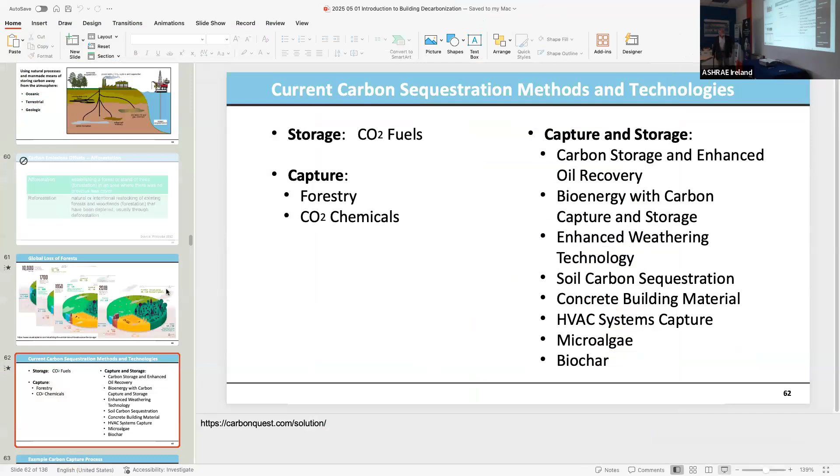Well, thank you very much for the invitation. It's always good to be in Dublin. I was here about 18 months ago - one of the groups I'm involved with, IBPSA, Building Performance Simulation, had our board meeting here, partly because most of our membership is here in Europe.

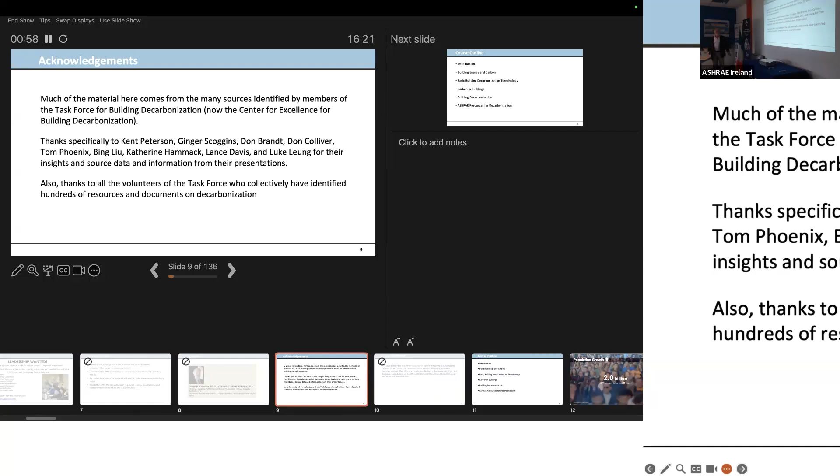So what you're getting is kind of a shortened version of a 2.5-hour talk I give for the ASHRAE Learning Institute, so this is a truncated version, but the core content is still here. Much of the material came from other places, other people - multiple past presidents, Kent Peterson, Ginger Scoggins, Don Colliver, Tom Phoenix, all past presidents of ASHRAE - and others who were together with me on the task force for building decarbonization, and that's how I was able to at least start the outline of what's here.

So we're going to talk a little bit about building energy and carbon, terminology, carbon in buildings, building decarbonization, and what ASHRAE is doing for decarbonization. I will cover some of it very briefly, and I'll be sharing the presentation so the chapter can post it, because there are about 10 pages of web links at the end for various resources to make it easier. We won't go through all of that.

Excuse me. So we are seeing, in late 2022, the global population changed to 8 billion people on the planet. We're expected to add another 2 billion in the next 30 years or so, so that's a big move forward. That means we have to deal with a 26% increase in people, housing them, having places for them to work, and that means we're going to have to create more space. Estimated by 2060, we're going to need 230 billion square meters of space, which is constructing New York City every month.

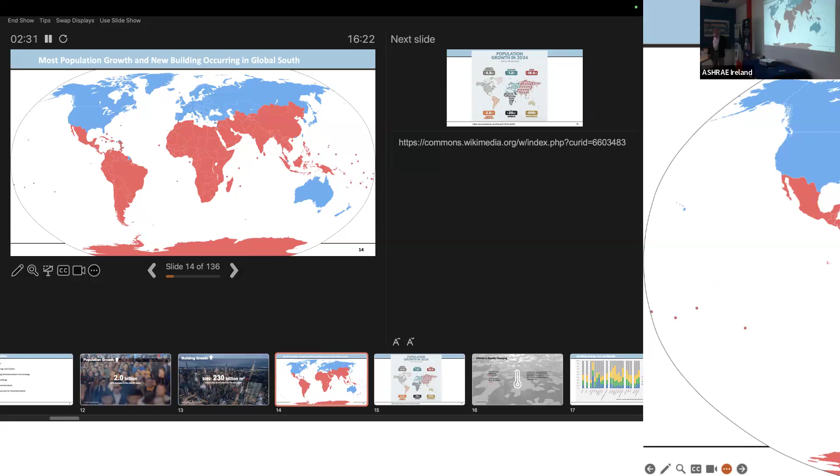Now, it's not going to happen in the term the UN uses, the global north, the blue part here - it's all in the global south. You see this population growth: North America grew a little bit, only like 1% or so. Europe is actually down a bit last year. Asia is still growing. Africa, of course, is the highest growth area, and that's where a lot of the largest growth is. China is shrinking a bit at this point, but India is continuing to expand. Indonesia, Nigeria, and a few other African countries are going to be larger than any other countries out there in terms of population.

Under the Paris Agreement, countries committed to trying to reach 2 degrees C, but it was changed to 1.5 as far as the 2018 IPCC recommendation. But that's already a challenge. I'm not going to talk about climate change here, but last year was already at 1.54 degree change globally. So we're already exceeding that, and we were supposed to not reach this until 2100.

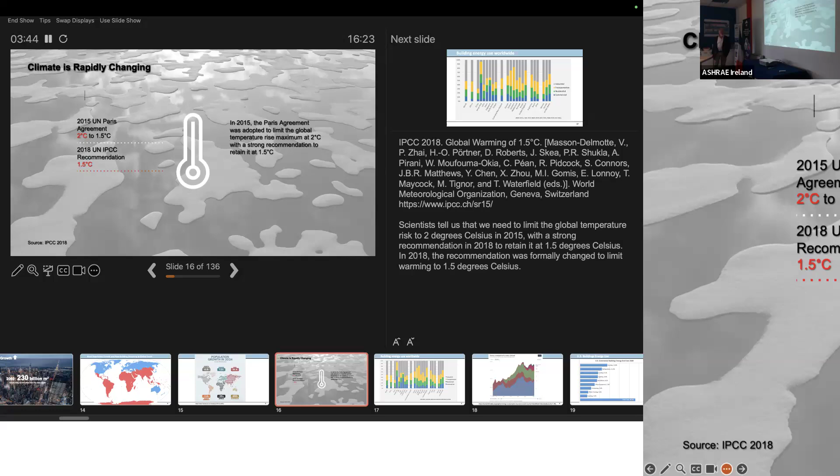The other thing I'd like to talk about is our energy, because energy and carbon are somewhat interchangeable, particularly for buildings. Globally, buildings are responsible for about 30% of energy and 37% of carbon. A lot of that's driven by electricity and other use.

The range is there, the third and fourth bars, China and Hong Kong, where China is only about 20% for buildings. But when I started putting these together 20 some years ago, that was only 10%. So they've doubled the amount of floor space, or at least the energy consumption in buildings. Hong Kong, on the other side, is 65% buildings and only a little bit for industry. So industry energy use is driving their economy in China, and they have a lot of coal use as well. You see Europe generally is just a bit under 40% for buildings, and it varies by country.

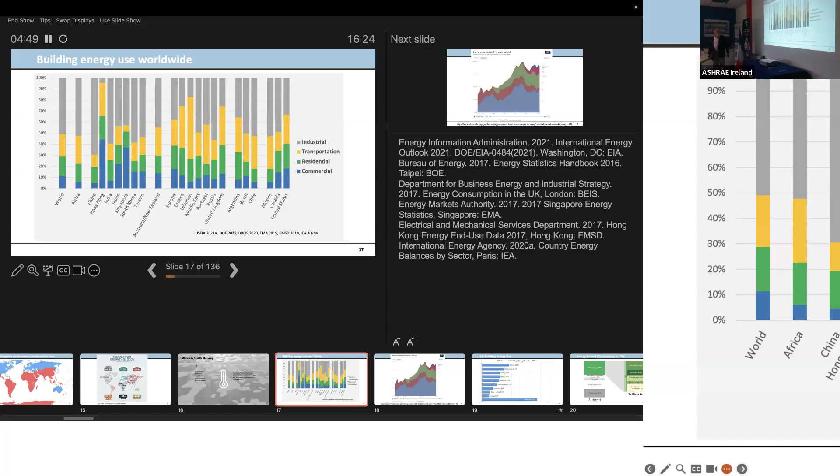In the US, about 40% for our buildings, half residential, half commercial. I only show this to make the point that our buildings are quite different than they were 20 years ago in terms of what we were doing. Yes, we have traditional heating, water heating, cooling, appliances and cooking. Computers are showing up in US buildings as a percentage, but then there's this whole category of other uses. What that means is devices like this that draw a little bit of power are now accounting for a full quarter of energy use in the US.

I have 25-year-old twins, and our son is living with us again after university. I wonder why my Wi-Fi is slow. I go on the router and there's 17 devices connected, and probably 16 of them are his. He's got everything on it. So that's what's driving that today.

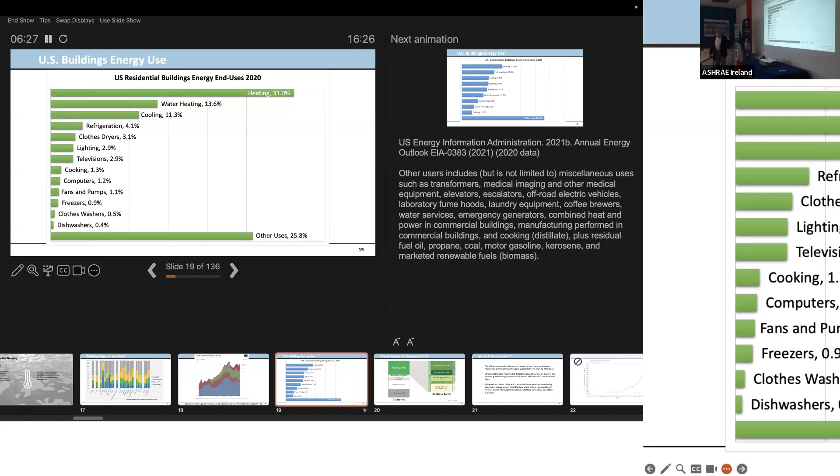So we need to keep in mind that it's not just the traditional things we worry about, building fabric and the systems. It's got to be everything within the building as well.

As far as commercial buildings, this is across everything, but if it were a supermarket or grocery store, refrigeration would be 50% of energy use, with cooling and lighting kind of secondary. For an office building, yes, heating, cooling, lighting, ventilation.

But the interesting thing to me across the sector is that office equipment and computing is now 13%. A lot of that's driven by growth in data centers and other computing uses there. Again, there's another large 'other use' percentage that does include elevators and other lifts and such.

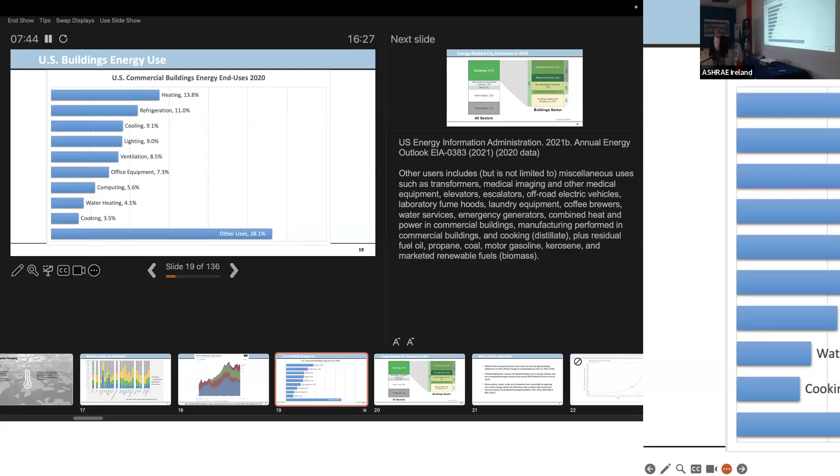The computing, I think, is going to continue rising for a while. There's such demand for AI computing that we're seeing data centers, particularly where I live in Washington, D.C., Northern Virginia is kind of an epicenter of that because 70% of the world's internet traffic goes through there. Which is surprising, but when all the fiber optic cables were being put in place in the 90s, that was already a big hub for that. So that's kind of not surprising. We are seeing that drive for growth.

If we look at carbon emissions, buildings are responsible for about 37%. And if you break that out, 10% of that 37 is for new construction. That's the embodied energy and the energy to construct, with residential taking about half of the remainder and non-residential a little less.

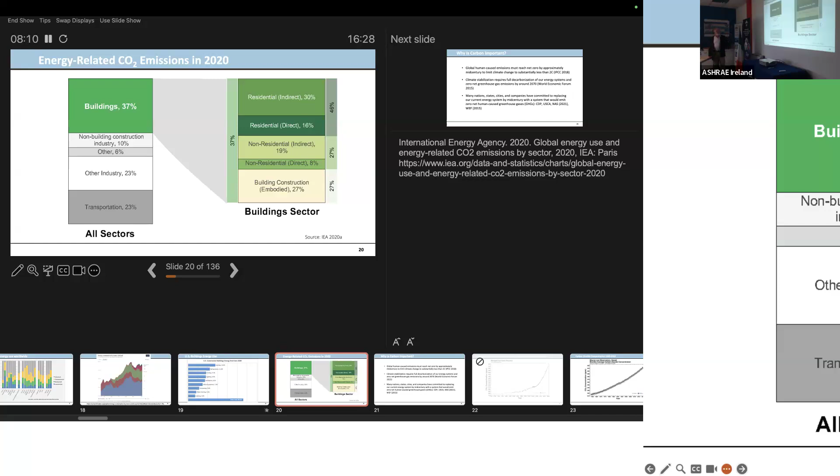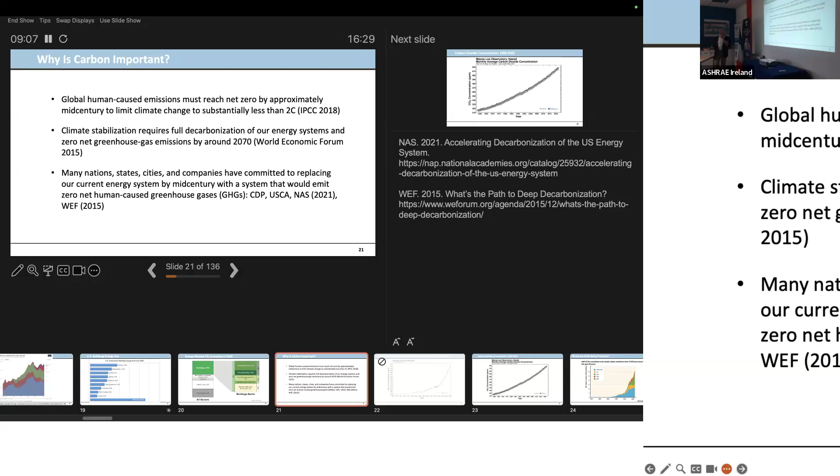If we're going to actually decarbonize and work to affect climate repair, we're going to have to limit climate change to less than 2 degrees, which is increasingly difficult given where we are today. That means decarbonization of our energy systems by 2070, and in some cases it needs to be earlier. A lot of nation states, companies and cities are really taking the lead here today in replacing current systems. There are a number of places saying they're going to be net zero by 2030, and they're looking to transform their energy supply. A combination of getting away from fossil fuels and moving toward renewable electricity is really key.

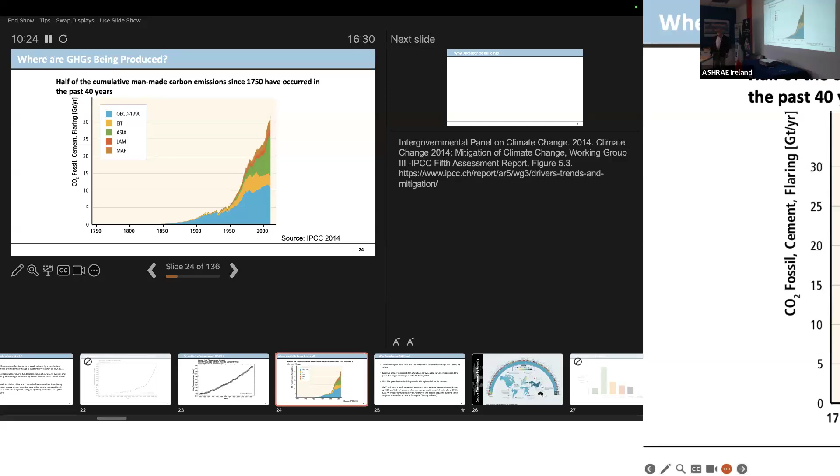Half of the carbon we've put in the atmosphere has been there in the last 40 years. Initially it was OECD countries, primarily Europe and the US, back early in the century, and they're still contributing almost 40% of that. But energy is in transition—Asia, Latin America, Asia particularly—China's growth in energy has been just phenomenal the last several decades.

So why does this matter? Climate change is probably going to affect every one of us. It's going to be the biggest challenge we as a society have faced in trying to address. It affects everybody in different ways, but it's something we're going to have to deal with if we're going to be able to survive. There are places that are going to be too hot to live if trends continue.

Buildings are already responsible for over a third of the carbon contribution, and the building stock is supposed to double by 2060, so that's going to be even more exacerbated. If we're not careful and don't design our buildings to be energy efficient to begin with, they can lock in those energy losses and high emissions for decades. Even with changing out mechanical equipment and efficiency over time, it's still the inefficiency inherent in the building that will remain.

The UN Environment Program says we've got to cut emissions by about 50%, that's about 6% per year by 2030. When they wrote this a couple years ago, that 6% per year drop was about equal to what happened during the COVID pandemic when everybody stayed home. Well, we're already not getting any savings—we've already come back and passed that globally today.

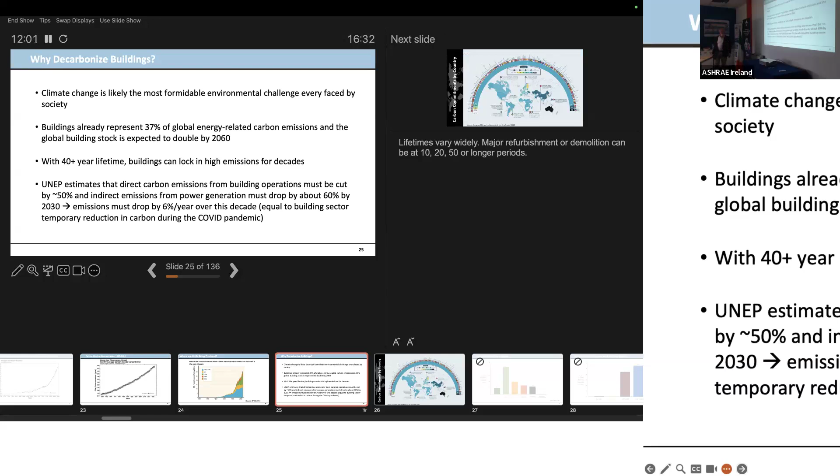This is a commitment for meeting the Paris Agreement, the 1.5 degree decarbonizing target, and there are a few countries that have achieved it or are about to—Uruguay by 2030, Finland by 2035, and a few smaller countries that had huge hydro resources to begin with. But the bulk of them, the blue bar, is 2050, and that's what most people are saying they're going to be able to achieve. Of course, the U.S. has withdrawn or will withdraw from the agreement, backpedaling on just about everything.

But I think the world is already moving forward, and one of the things, my personal opinion, the current administration doesn't understand, is that they think coal was punished for being coal and being dirty. The reality is that natural gas was cheaper, and renewables are now cheaper than anything as a new source for electricity—and that's been true for a while. I lived in California in the 90s, and at that point the cheapest source for the electric utility for new power were wind turbines. That was already true 30 years ago. So it's not that coal is dirty so much as it was a cost reasoning for that.

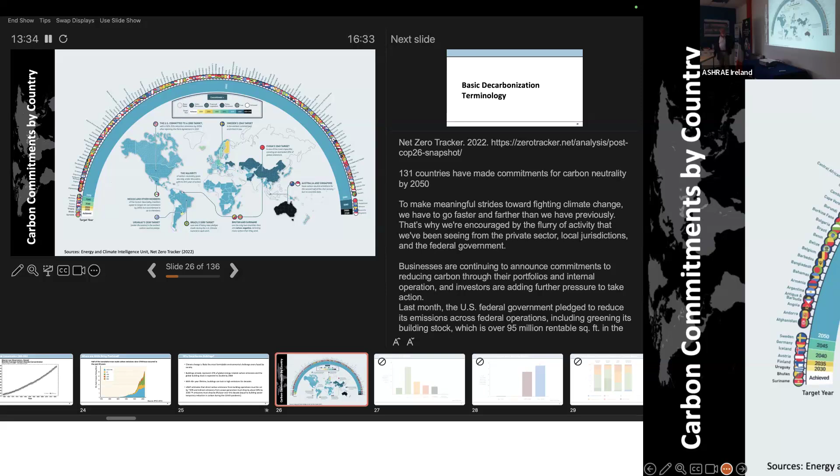I think we're going to see it continue in the US despite the lack of interest from the administration. So I'm just going to flash through this to give you an idea of the terms we're going to talk about.

Carbon dioxide, global warming potential, greenhouse gases—these are all definitions from the IPCC. Carbon dioxide equivalent emissions, or CO2e, that's really the key term here. It's basically taking the global warming potential of each of the constituent gases we're emitting, multiplying that by the mass that's there, and looking at that over a 100-year horizon. So if I'm talking about carbon, I'm mostly talking about the carbon equivalent for everything here.

Operational carbon is the emissions from operating something, the building or the industry plant. Embodied carbon is the carbon associated with creating the products, materials, and construction itself that make up our buildings. Direct means fossil fuel combustion on site. Indirect is from the power plant, which may use fossil fuel.

The prior administration pushed to electrify everything. Electrification is really important, and heat pumps were being pushed in a big way. I know in Europe they were too, Germany was going crazy with heat pumps, and I think that will continue.

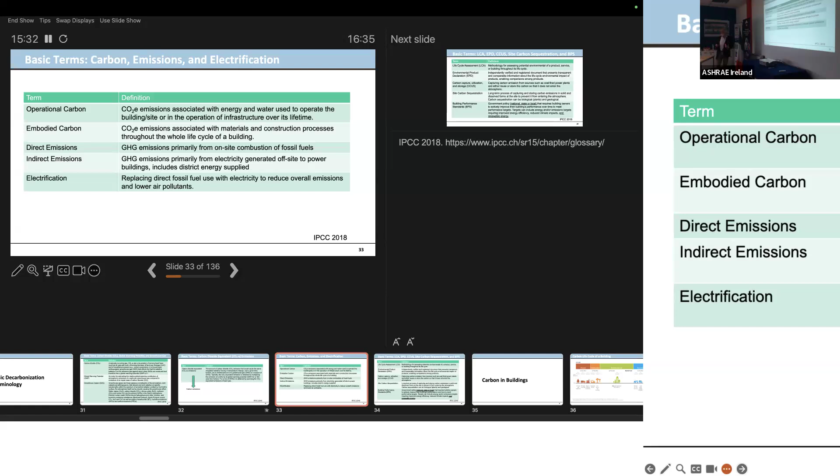The problem is that if we electrified everything in the US, the grid would fail. We need twice as much power as we have now. So one of the things that has to be done with electrification is efficiency, and if we don't do that, we're going to be paying for a lot of new power plants.

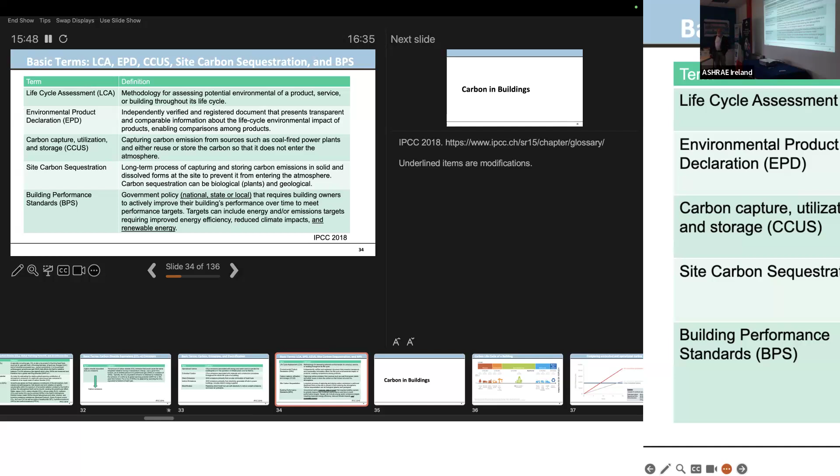Other things we'll talk about: life cycle assessment, environmental product declaration, carbon capture, site carbon sequestration like trees, building performance standards, and other things happening that are pushing in different ways.

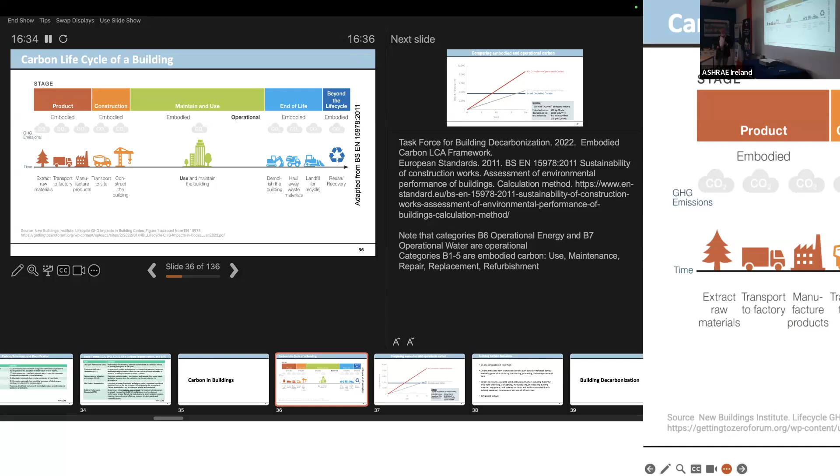So it looks like a lot of embodied carbon is dominating. For most of our buildings, operational carbon still outweighs embodied carbon. As buildings become more and more efficient toward net zero, then we'll get there.

Here's kind of a typical example: a building with a 20-year life has embodied carbon of 400 kilograms per square meter over that life, or a very efficient building only 20. The initial embodied carbon is estimated at, I don't have the exact number up there, but say around 4,000. What it shows is that as buildings become much more efficient, embodied carbon is going to take over. I think this gives us some time to work on that.

Two of our building materials, infrastructure in general, that are very energy and carbon intensive are steel and concrete, and there are already moves afoot to address that. I know car manufacturers, I can't remember which German one it was, are already talking about blue steel or green steel, producing steel to make the car with renewable energy so they're not contributing to emissions. We have some time to try to address that initial embodied carbon, because once you use it, it's already there, there's no reason to try to replace it, the new should be better.

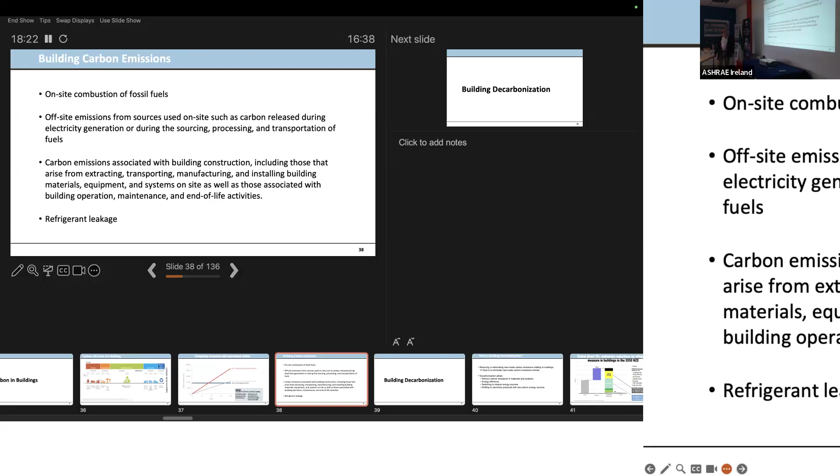So there's on-site combustion of fuels, off-site emissions from electricity production, and the emissions related to it. Another big one we may not think about is refrigerant leakage. Buildings are actually pretty good about not leaking, but our transport, the lorries and everything driving around out there, leak quite a bit. I'll talk about that a little later.

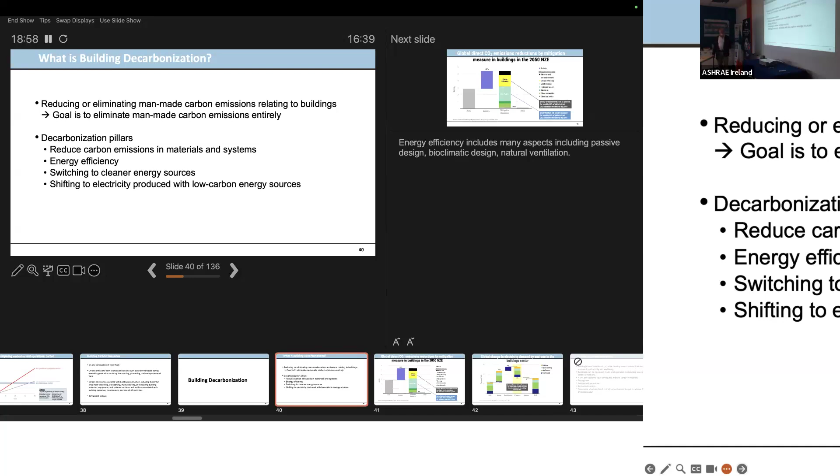So what does that mean? It means if we're decarbonizing the building, we've got to reduce man-made carbon emissions entirely, that's the ultimate goal. It means moving away from fossil fuels, improving energy efficiency, and switching to cleaner sources and low carbon electricity where possible. The grid will continue to get better, they have been for many years.

This is from the International Energy Agency, their kind of roadmap for how we could get to zero in buildings. Starting in 2020, by 2050 we've doubled the amount of floor area. The mitigation through energy efficiency, electrification, and some other behavioral elements means we can reduce emissions by 98%, close to zero. So that is a possibility.

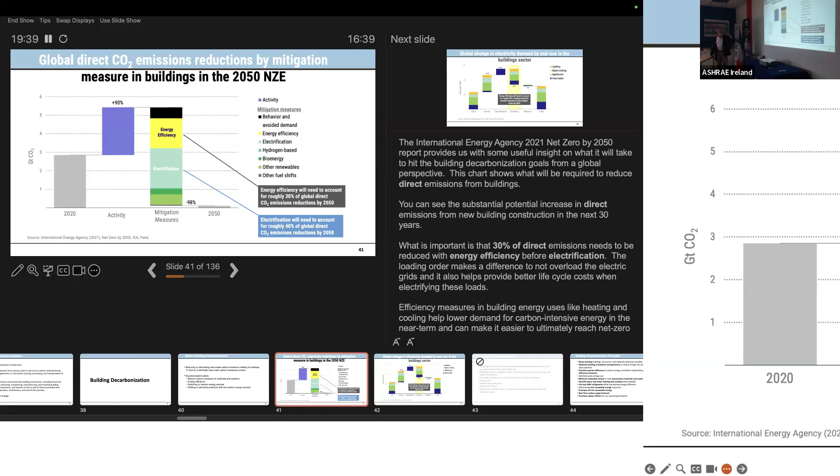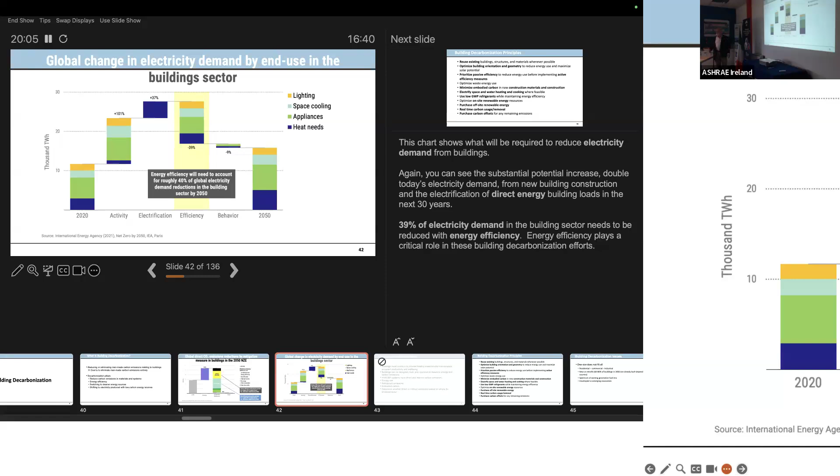A combination of efficiency and electrification are really key for that. If you look at it more closely, what's causing additional activity is increasing lighting, cooling, and appliances, and electrification is going to raise the amount of energy needed a bit more just because of inefficiencies of the grid. So efficiency has to account for about 40% of that, we can't just say electrify everything, that doesn't solve the issue.

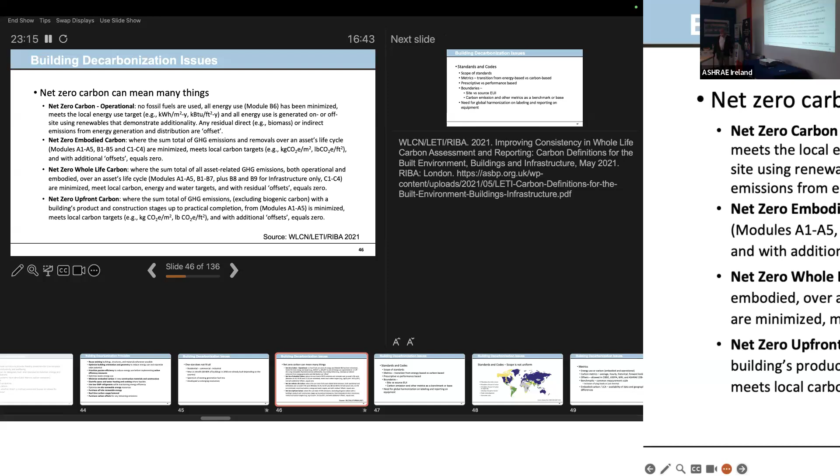And net zero upfront is minimizing all of that, but then working to do additional offsets to make sure the building starts at zero to begin. A little different from that whole life approach, but there.

The other thing is we have a number of standards, both energy and some carbon standards now in place, but many of them don't cover everything. The metrics—ASHRAE Standard 90.1 for many years was kind of the de facto energy standard, but it's now transitioning from an energy basis to a carbon-based standard, and that's what it's going to take to help us start thinking about the end result, not just how the energy is done.

Many standards globally are more prescriptive instead of performance-based. Performance gives you a lot more flexibility. And then it goes to where are you measuring—what's the boundary for that? Is it just the building site, or all the way back to the power plants? Also then, is it carbon emissions, or other metrics? What are we starting with?

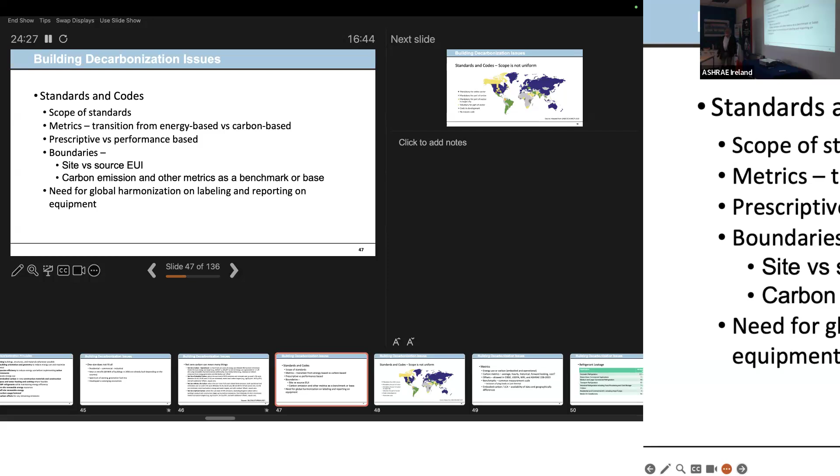We also, particularly in the building services area, need better labeling and reporting on carbon emissions. We don't have good ones today. There's some hope for that, I think.

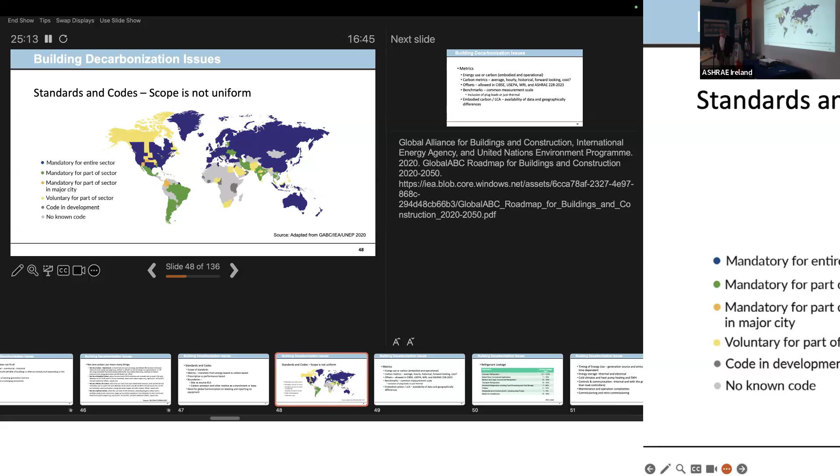This is from a UNEP report showing the purple areas have some sort of standards. You see, even in the US, we don't have statewide standards in many of those states in the middle. Now, large cities in there probably do, but for most of the state, there's just nothing requiring any energy efficiency. You see some hope in South America, Europe, and Asia—at least North Asia is pretty good. India has one, not terribly well enforced at this point, but you see kind of that blank slate for Africa, and that's where a lot of the construction's coming.

The other thing, metrics: what are we specifically talking about? I can talk about carbon dioxide equivalent, but where are we measuring it? Is it energy or carbon, embodied or operational? And then which of the carbon metrics do you want to use—average, hourly, historical, forward-looking, cost-based—different organizations are using all of them. Some people talk about a 20-year horizon, some people talk about 100, and that makes a big difference. I believe the ASHRAE board has said to use 20-year now.

I may be wrong on that. Offsets—CIBSE, US EPA used to, World Resource Institute, and ASHRAE's new Standard 228 all allow offsets against that operational carbon. Do we have a common measurement? ASHRAE 90.1 is pretty much regulating everything except the interiors. Kitchens are included, ventilation, lots of different sources there, but is it everything, including all the plug loads that I showed you, which can be a large part of both?

And then embodied carbon and doing life cycle analysis, do we have the data? Europe's got decent data sets for LCA, but the US is kind of spotty. And then in other places, there's just no data available for looking at what the carbon impact of various products and systems are.

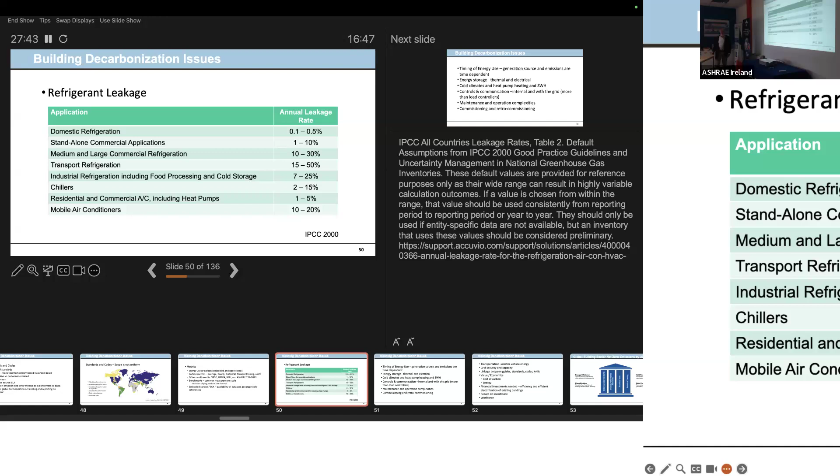Our chillers and AC, not bad. Chillers about 15%, heat pumps down in the 5% range. So not contributing too much, but there's still more we could do because they are particularly high global warming potential.

Other things: timing, depending on when you use electricity or any fuel, what is the generation source and the emissions? When do they occur? Would it be better if you used energy at different times? Energy storage, could we offset some of that by storing energy, both thermal and/or electrical, which we're beginning to see more of.

At the utility scale, I've seen several 5 megawatt systems that have gone up in Australia, and they're using them not only as backup but as real-time peaking to try to reduce the cost of peak electricity because they can store the renewables at night.

Keep talking about heat pumps. Heat pumps don't work so well once you get below about -8, -9. They work okay, but then you're getting down to electric resistance, and so your COP is 1. But there's a lot of work going on right now, so I expect we're going to see some sea changes in cold climate heat pumps.

We don't know what's going on with the grid, we don't have a lot of good information. ASHRAE has written a guide about integrating with the grid and how to go about getting that information, but it's got to be more than just load controllers.

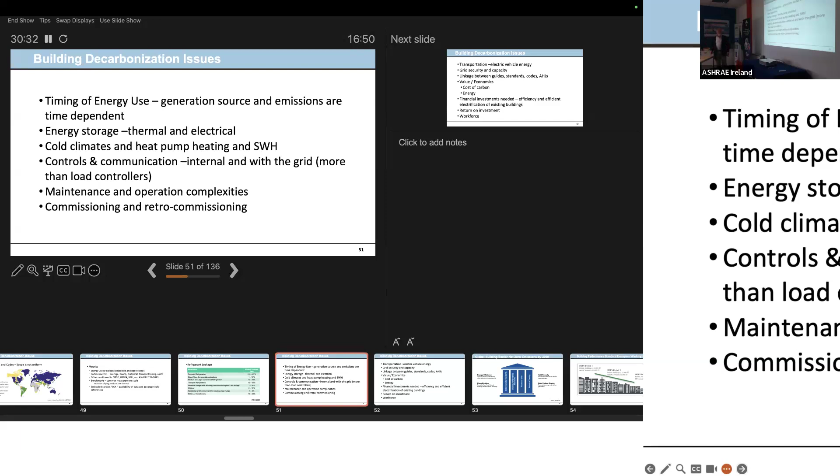Transportation, we're dealing with EVs, energy on site. I see EV chargers around this office park. How is that contributing to energy use? Grid security, and security is kind of a real issue. A lot of what we're talking about today, it matters who has access to information and when they should have access.

Are the guides, standards, and codes actually having an impact for the local people? Are there ways to teach people how to go about doing a better building in a guide? A standard limits what you do, and the code is the legal limit. But is that all cooperating?

Value and economics, what is the cost of carbon? What's the cost of energy? And how is that working together? Are we seeing the benefit of reducing our carbon in particular buildings?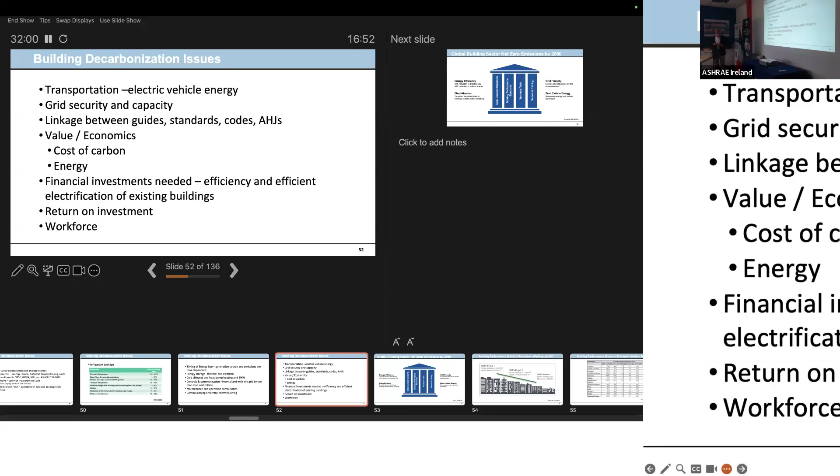I see estimates of financial investments on the order of $3 to $4 trillion a year that need to be invested to make our buildings better, just for that. That's a large amount of money we have to put forward. And is there any return for that? Do we have the people that can do it today? It's a workforce issue. Are we training people the right way to be able to manage these more complex buildings, but also to build them as well?

This is another one from the International Energy Agency. Efficiency, electrification, grid friendly, and zero carbon energy are all key themes they have. But we need standards driving toward net zero, building performance standards. I'll talk a little more about that - the technical tools for design and retrofit professionals to do that, and the training to bring up a new generation able to handle this.

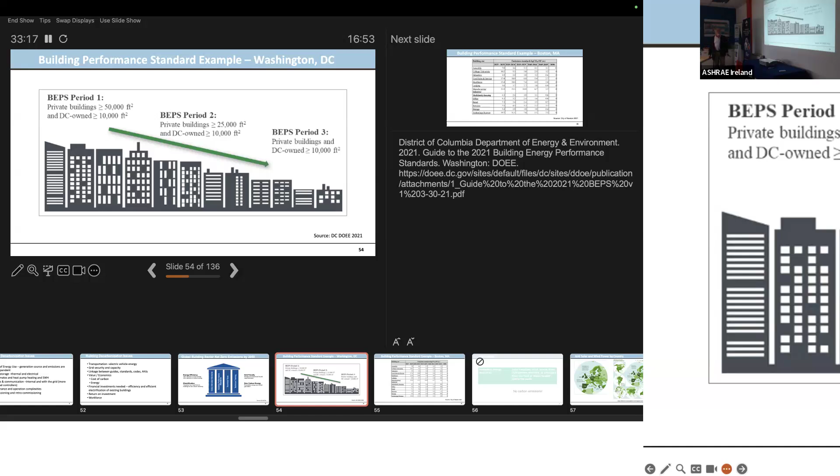This is an example of a building performance standard - this is Washington, D.C. They've decided that beginning next year, buildings have to disclose their energy use, and they have to be on a track to reduce it to zero - either net zero, buying offsets, or other ways. This is showing, starting with buildings over 5,000 square meters and DC-owned buildings of 1,000, then increasing to 2,500, and then on to everything over 1,000 square meters. So that's a big step forward.

And this is an example - this is Boston, and they've actually set kilograms of CO2 equivalent per floor area for each year by all the building types. So they're already beginning to look at that, and you see that by 2050, everything goes to zero. I don't know how it's going in Boston.

New York City has the same thing, and the targets are beginning to hit by the end of this year. There's supposed to be a 10% reduction in energy use or carbon use in every building in New York City, which will be very interesting to watch. So the building performance standards are pushing that efficiency, that carbon reduction, from the top down.

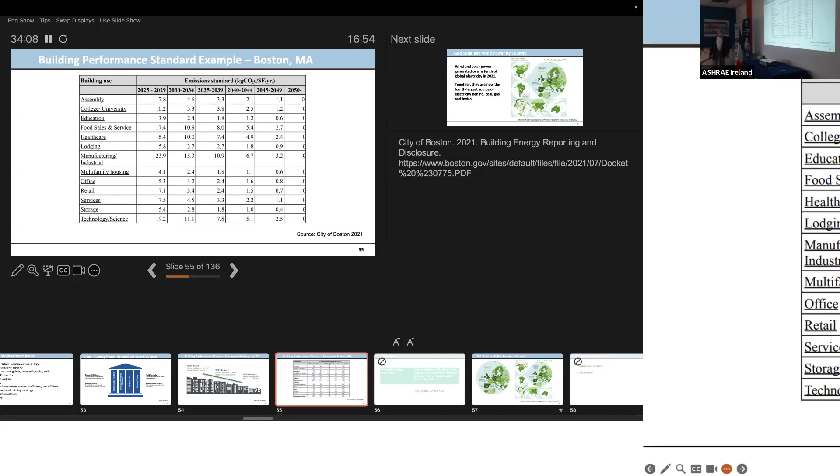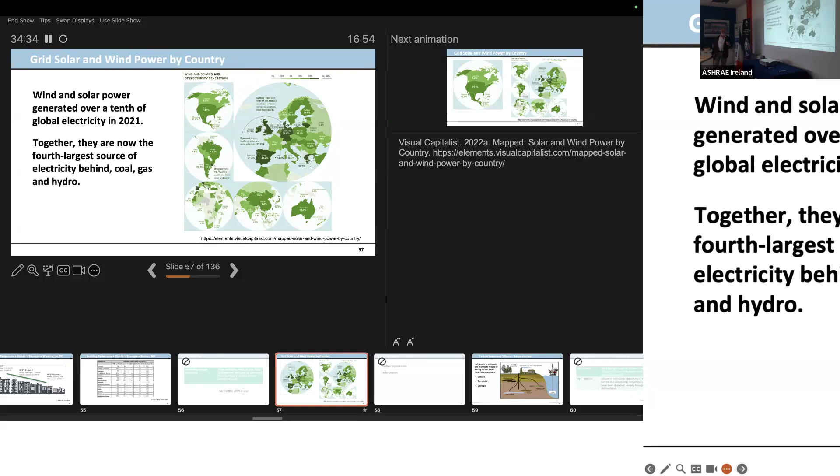Renewables play a big role both at the building level and at the grid level. A tenth of global electricity - I think it's up over 15% last year. I don't have a new update on this, but it's the fourth largest source behind coal, gas, and hydro, and I think that's changed - in some cases I've seen it surpass coal recently. But if we look at North America, the US was about 13%, and that's pushing 20% now.

Other places, not so much. Canada is a little lagging there, but they have a huge resource of hydropower in much of Canada. South America - Chile at 21%, really good. Uruguay is getting over 46% of its power, and there are some days it's totally renewable energy. Brazil looks like it's behind at 13%, but over 40% of their electricity is already hydro-based, and it's only the last 30 years that have really driven them to build other kinds of power plants.

Looking at Africa, not much - Mauritania and Morocco at 13-14%. Kenya doing well at 17%, but much of the rest of the continent is not doing anything. If you look at Nigeria, which is the largest economy in Africa, it's an oil economy, so they're not really that interested in renewables right now - they have cheap resources. Looking at Asia, China at 11%, aggressively building solar and wind where they can.

India is coming up. I was in India, I guess it was February, and driving along the road you would see these huge wind turbine blades just sitting there waiting to be transported at night, because they block every lane of the highway. So they're really pushing for that. Asia's got a bit of work to do.

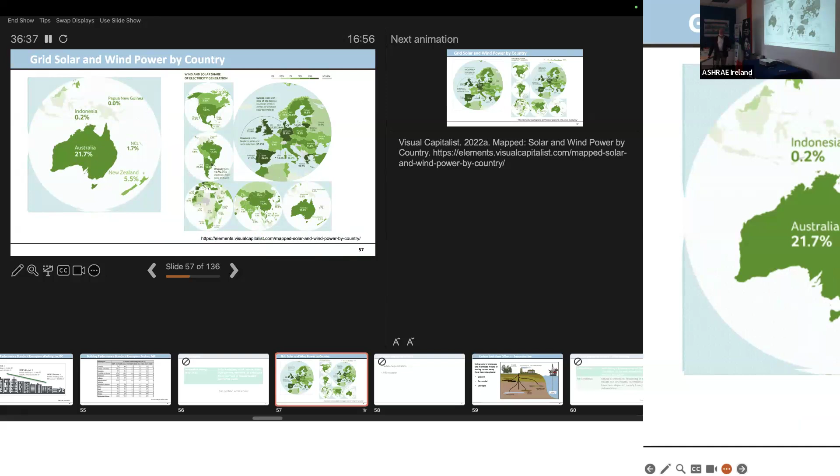Australia - and I didn't point it out, but in the chart that showed the 2050 goal, Australia said they weren't going to be able to meet that till 2100, and yet they're already at 21% renewables. The problem is they have a lot of coal and it's cheap, and they're shipping it to China primarily at this point. And of course, Europe is doing quite well, in the 30s, with Denmark up at 51%.

There are a lot of days when Denmark, in the spring and fall months, is totally renewable power for the grid. The UK just shut down their last coal plant last year, so it's increasing as well. Finland, I think, is going to be an early growth.

The renewables not so much, as they put a huge new nuclear plant online, and nuclear, except for the embodied part of the plant, the production part is pretty much zero carbon, so it is still something that can be used for that.

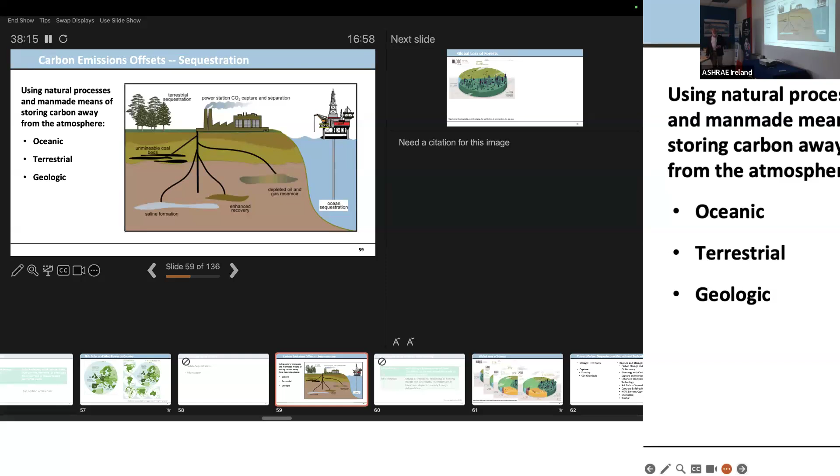Other things we can offset: we can put the carbon in the ground or in the sea. Trees, of course, are a great source of doing that. Power stations, we can capture and separate that. There's a lot of work going on to keep that clean. Pumping it into the ocean, and the ocean is the largest storage of carbon anyway. The problem is, as ocean temperatures rise, as they've been doing the last few years, that means they can store less carbon. Cold water stores carbon better. But we can also put it into unmineable coal beds, saline, or depleted oil and gas reserves as well, get it underground.

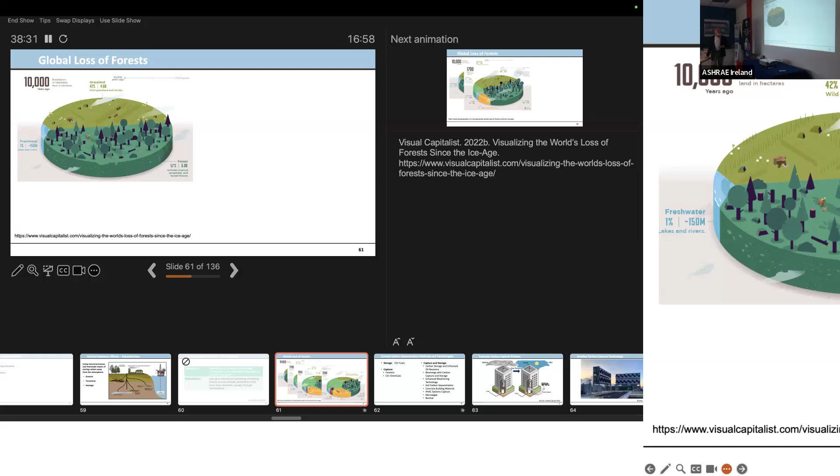A lot of the crops are to feed that livestock. Grasslands down to 12% globally. Forests cut down, we've now lost about 10% for that. Urban is still quite small. By 2018, urban is now 1%, but grazing is at the same level. Grasslands recovering a bit, and crops are still growing. We've got 15%. What that means is we're eating into the forest.

So if the forest is a resource for carbon sequestration, we need to use that. Unfortunately, we have places like the Amazon in Brazil where everything's being cut, somewhat illegally, clearing one of the best resources for sequestration globally.

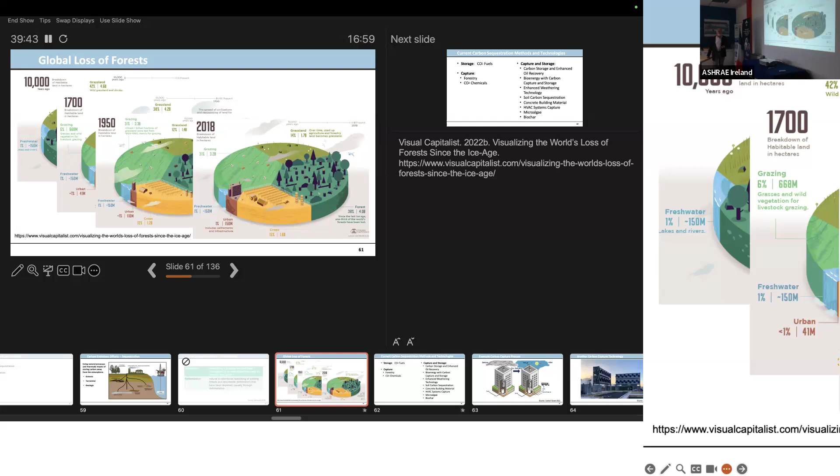Other things, we can store CO2 as a fuel. Forestry, we can use it in chemicals, often, and a long list of other things, but frankly those are the only two things we could do as a building. Working with concrete, reducing the carbon impact there, which is quite high, and also at the HVAC, the building services level, trying to capture it before it's released.

This is interesting, this company basically puts something to capture the carbon before it goes up the boiler flue, and stores it on site. Then once in a while a truck comes by and takes the carbon off before they use it, so we're not releasing it into the atmosphere. I don't know what the cost on this is, I can't expect that it's going to be cheap.

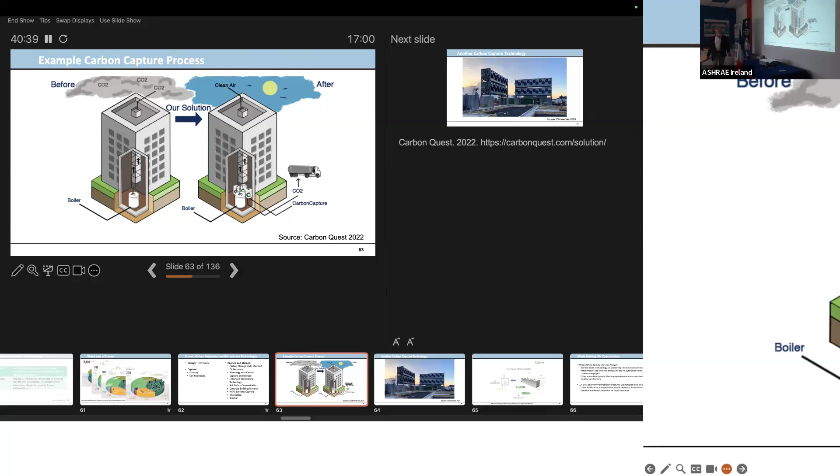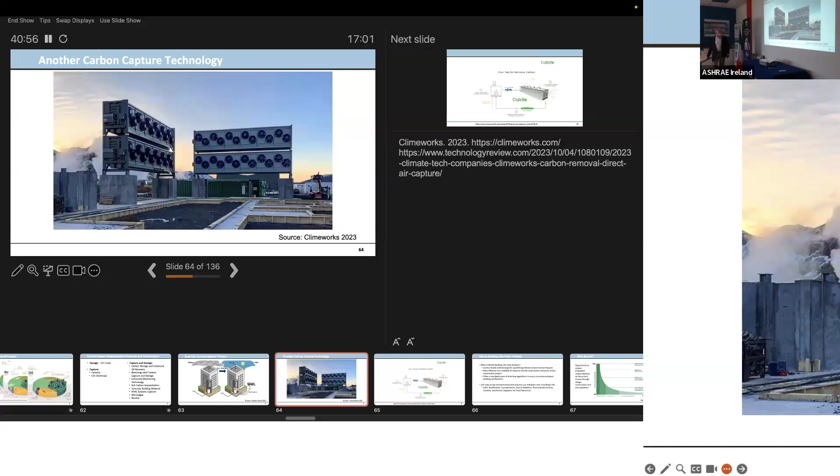Here's another one. These fans are literally sitting up in the air, and through internal processes they are capturing carbon and pumping it into tanks. I don't know how well this is working.

Another one, this was showing how it works: putting the CO2, it's absorbed into calcium carbonate, that then, with the carbon captured, decomposes, and then that's stored, and then that sends the calcium hydroxide back, so it's kind of a continuous cycle. That's one way of having it happen.

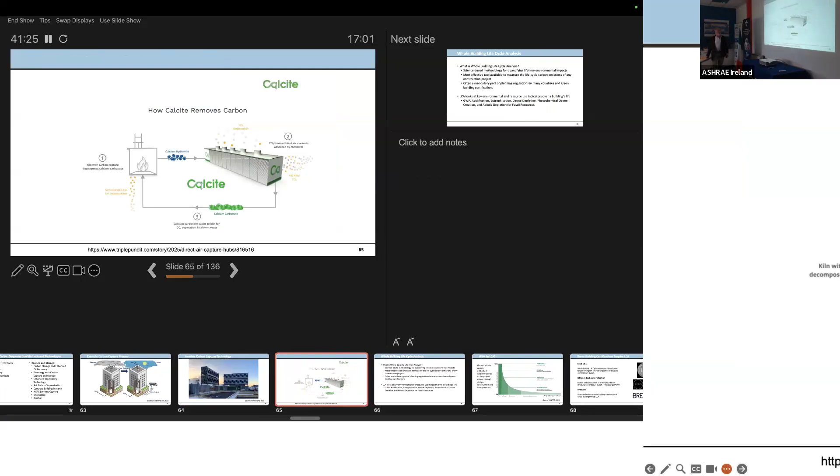Like with most things, the sooner you do an analysis, the better and more effective you're going to be. So in planning, early design, you can have very effective reduction in carbon. By the time you're in construction, you're probably too late to do much, so that's a kind of a challenge for us.

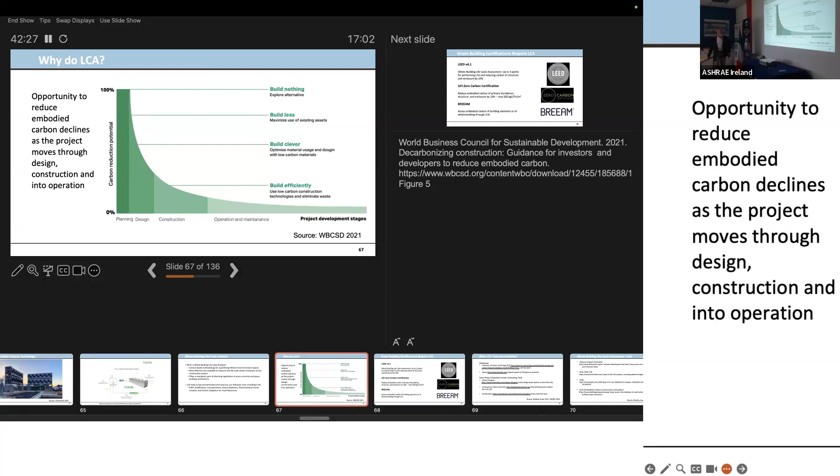There are places, LEED, I think LEED version 5 has now come out and they're saying about the same amount. The zero carbon certification from the International Living Future Institute has reducing embodied carbon of the foundation, structure, and enclosure as a theme - that's the steel and the concrete primarily, and glass - and they're saying reduced by 10%, not terribly a lot. BREEAM from the UK takes an independent view of assessing the embodied carbon, a separate consultant does that.

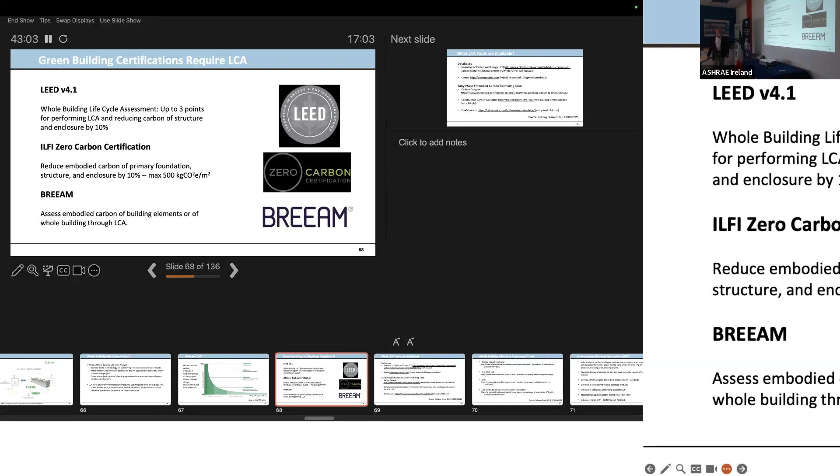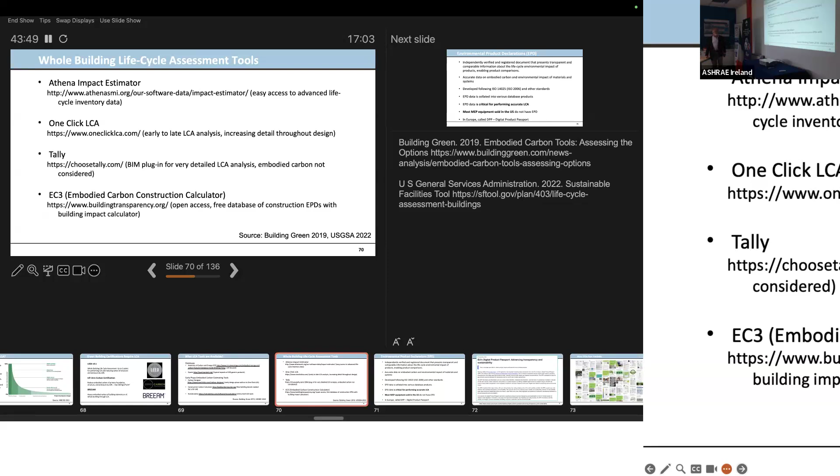My company actually uses one-click LCA and Tally, both primarily for embodied carbon. We're not trying to, we have the capability separately to do other carbon, the operational carbon.

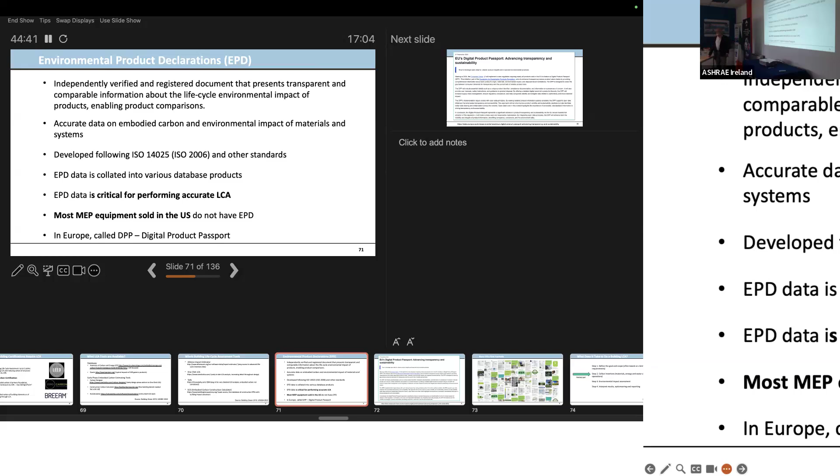This was something posted there. So it's part of the eco design for sustainable products regulation information - the same idea as an EPD, but a European twist on that. I think having that push from the EU is going to really move things forward.

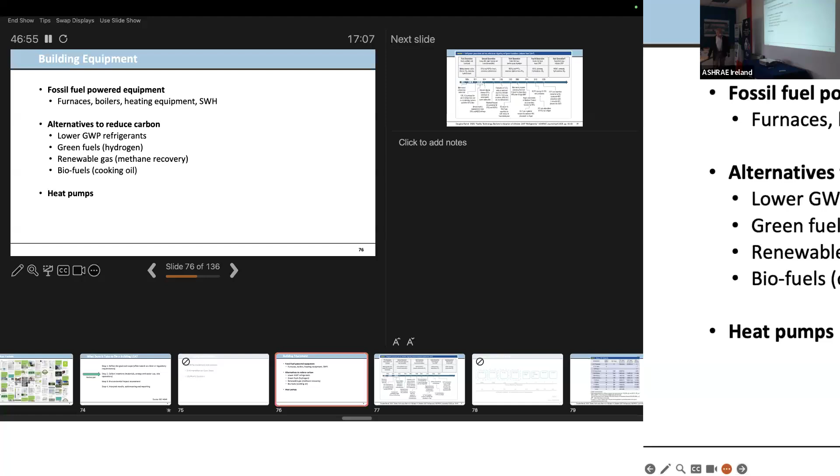This was actually in the April ASHRAE journal, and it kind of gives you a history of first, second, third, and we're now in fourth generation. HCFCs went out of production except for R123, and phase down of HFCs is already beginning. In the EU, F-gas regulation accelerated that HFC phase down, with a complete phase out by 2050.

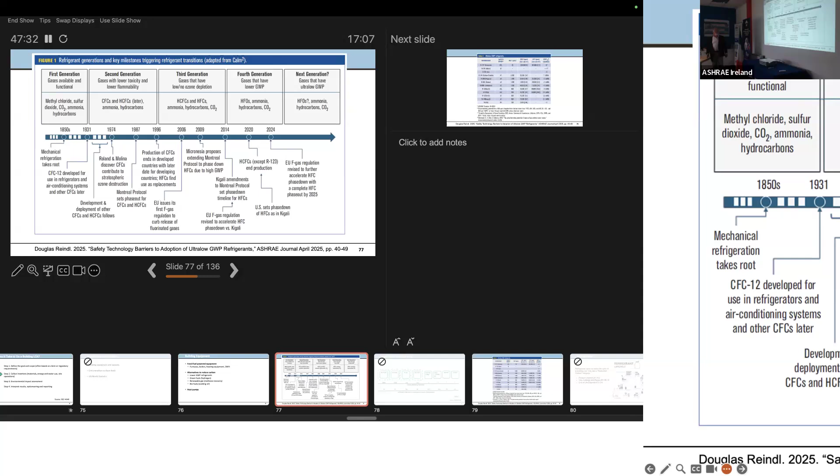Next generation, these are where we're going to see ultra low global warming potential. So here's kind of a list - there's ammonia, water, air, carbon dioxide, propane, butane, isobutane, and a number of new mixes. You see there's a combination of things. Their global warming potential on the far side, you see them quite low, single digits. A lot of the ones we just phased out could be hundreds of equivalent in the global warming potential.

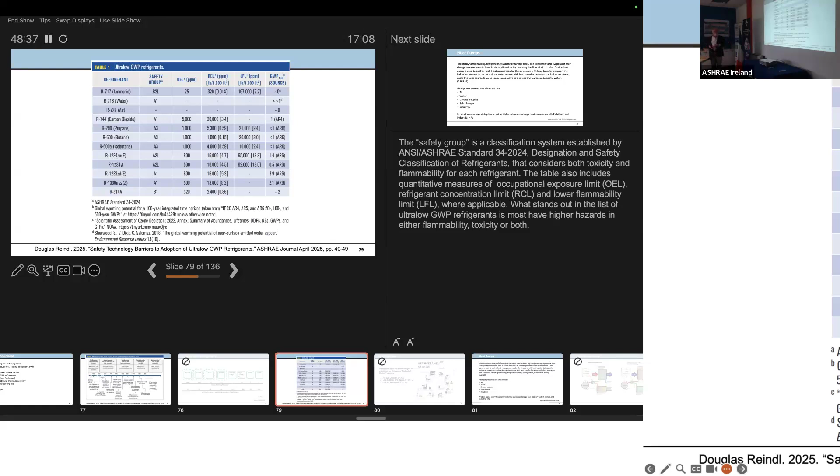And you see all the bits and pieces there, but one of the key things is they have to be safe. ASHRAE has a standard 34, which deals with refrigerant safety, and an A1 means not flammable and people can be exposed to it for long periods of time. But ammonia is not in that category - it's not safe. Some of the fuels there, propane, butane, also have a limited amount of time for exposure. So the ideal was to find something that's very low global warming potential and at the same time safe to be around.

Heat pumps - ASHRAE has really good information about them. The interesting thing I learned is that heat pumps are everywhere, from our cars, which particularly electric vehicles, are using heat pumps as a very efficient way to heat and cool the cars. Normally we either have a separate cooling system and use waste heat off the engine to heat, but in EVs we don't have that.

So there are lots of sources, scaling up to industrial and also residential appliances happening today - lots of boxes you'll see attached to buildings. One of the interesting ones is a heat pump water heater that essentially acts like a heat pump and heats your water. We bought one recently and it actually works pretty well and helps a lot. We can program it to be off when we're not around and save a lot there.

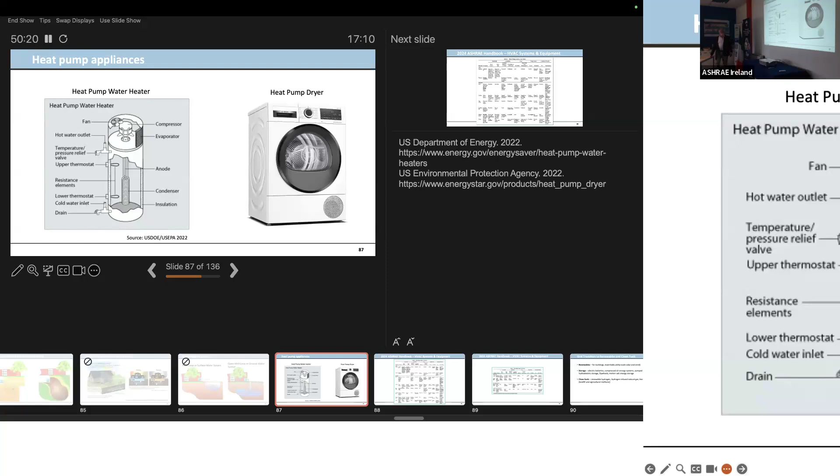The other one my wife and I did buy was a heat pump dryer. There's no vent out the back dumping moist, warm air - the only thing that comes out is water that's piped into where the washing machine dumps. We haven't gotten it to work yet, but we'll see. She keeps saying, well, I don't know, we may have to buy a new one. Hope not.

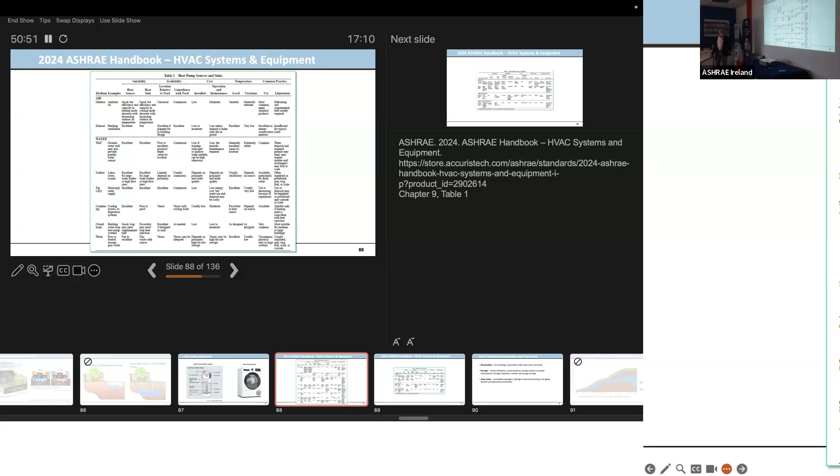Chapter 9 of the 2024 handbook has a great discussion of heat pumps, and this table is just part of it. It gives the medium of air, examples of it, heat source, heat sink, relative mean temperature, cost, and common practice - so you get an idea of what's going on there. Then we have all the water types related to that: ground source, solar energy, and industrial process. That chapter is particularly good if you're interested in looking at heat pumps and seeing what's going on.

As far as a grid transition to renewables, for buildings it's probably going to require utility scale. There are buildings that can do the individual approach, but it's still costly at a building owner level unless there are financial incentives. Storage - we're seeing more and more electric batteries. I mentioned utilities, but we've had compressed air systems and pumped hydroelectric for a while, and flywheels and molten salt have all been available for many years. We're also replacing fossil fuels with renewable hydrogen produced by renewable electricity, and improving natural gas by adding hydrogen to it, and biogases.

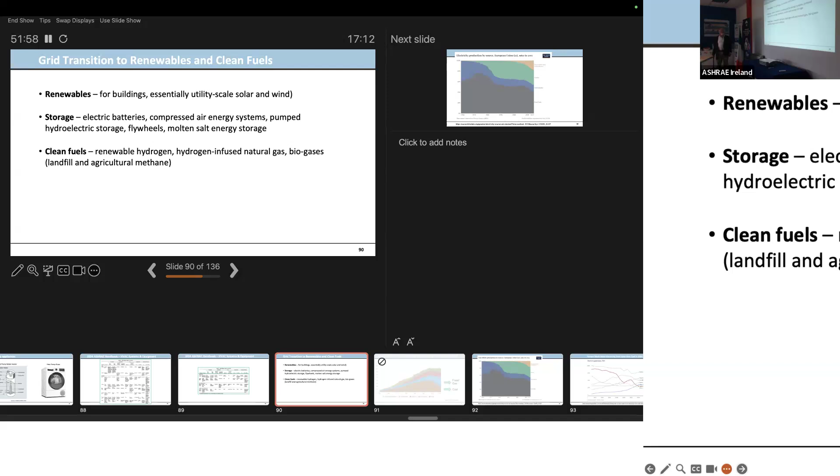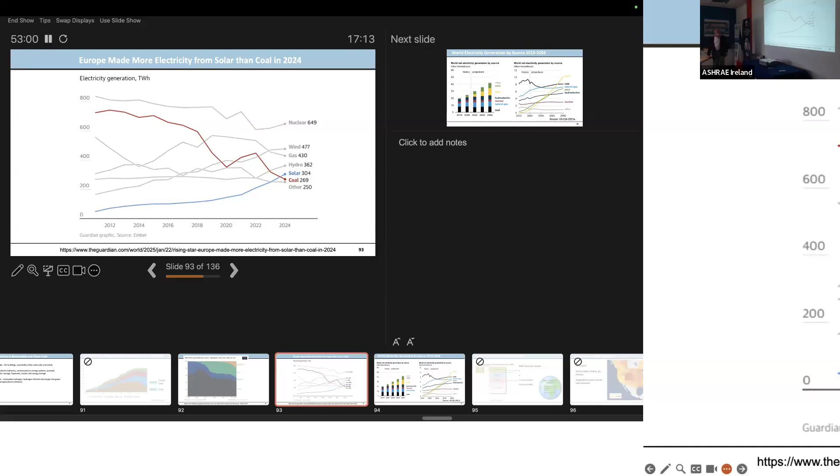Also, globally, solar surpassed coal in Europe in 2024. There are other sources - nuclear, wind, gas, hydro - that are in that range, but solar is beginning to really accelerate. This was from The Guardian back in January showing that solar particularly is doing very well.

But globally, this is from the U.S. Energy Information Administration - it shows coal staying kind of flat across the whole period, natural gas maybe a little growth, nuclear some but it takes a long time to get a nuclear plant on, and hydroelectric we've probably done everything we can. But solar is going to continue to explode in growth, maybe 3 times where we are today, along with wind. So they'll be making up even more of production, and by 2050 they're saying solar is going to have the highest production for electricity of any fuel type.

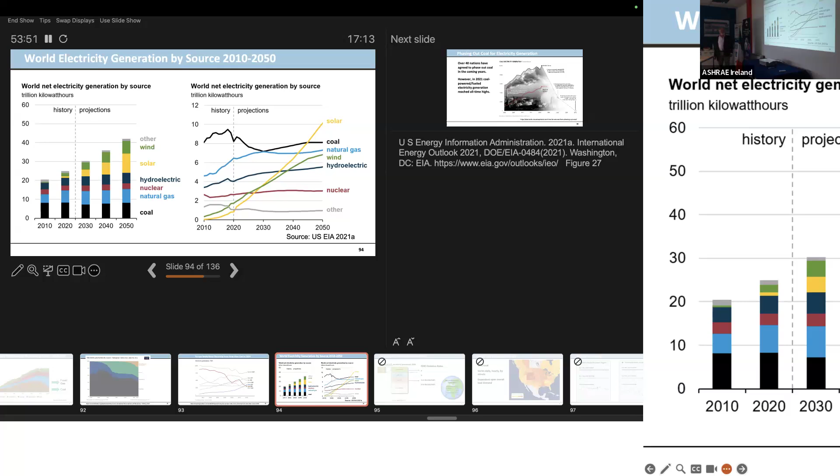We've changed fuels many times. We did biomass, human and animal power, where everything was done. A little bit of hydro for a lot of that, but most of it was human and animal.

1859, oil was discovered, producible oil in Pennsylvania, a long time before we started using it. 1930s, with the depression that happened, there was a lot of work to provide electricity generally to a lot of places globally, and steam powered, coal powered power plants particularly, even though coal had been used in industrial processes before that.

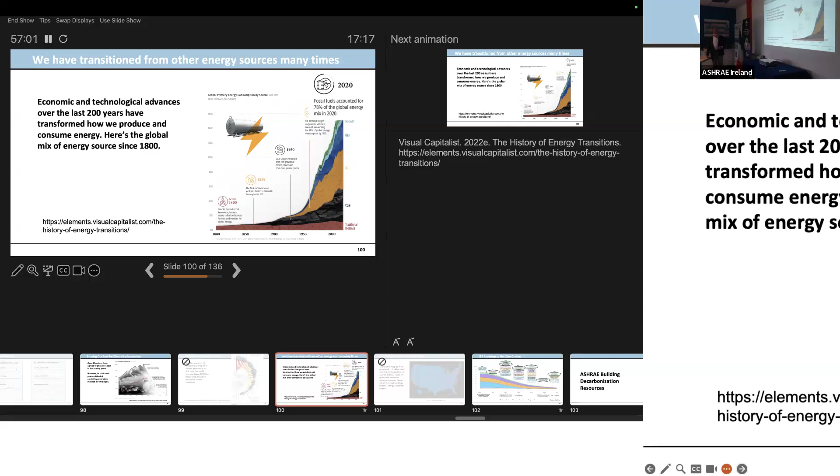So if we can get the coal down from the power plants and get oil down from using alternate vehicles, and it doesn't have to be just an electric vehicle. We've seen hydrogen power recently being prototyped by several manufacturers.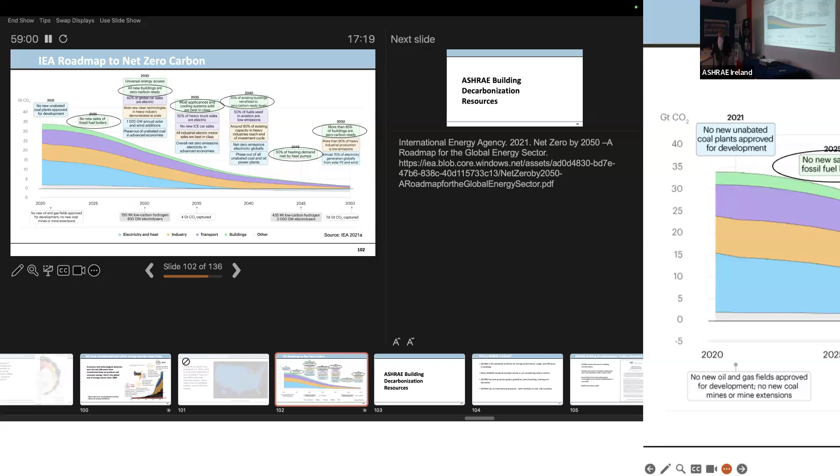50% of heating demand met by heat pumps. I think that could be pulled back by 2035 easily. Manufacturers are ramping up. And then 85% of buildings are zero carbon ready. That's still an aggressive goal, but I think that one may be possible as well by 2050.

So the last section I want to talk about is some of the resources that ASHRAE has put together for you. ASHRAE already has been the standards authority for energy performance. ASHRAE standard 90.1 is now 50 years old this year, and it's been looking at that efficiency for the building sector for many years, and that standard is aggressively moving toward carbon.

Lots of new carbon metrics showing up in other standards. ASHRAE also does best practices guides, and that's part of what they're doing in this work here. Members in 130 countries.

ASHRAE in 2022 published a position document on building decarbonization. These are essentially what ASHRAE believes in. This is done by a committee. They normally take 18 months to 2 years. This was done in about 6 months because it was actually easier to write than some of the others.

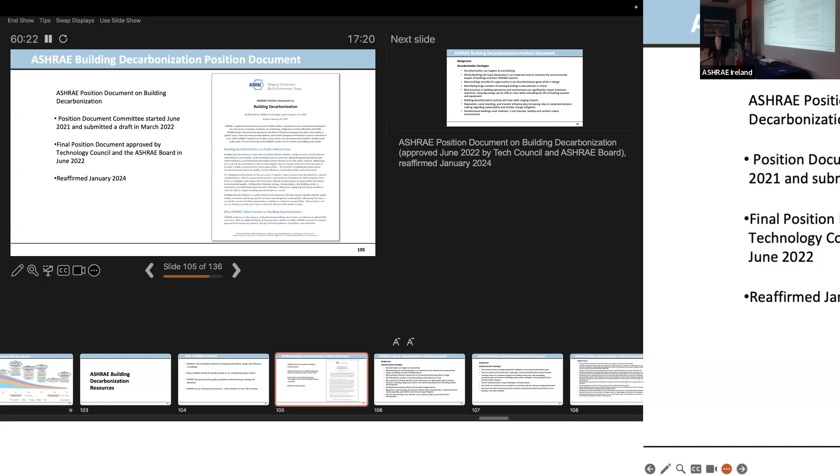So ASHRAE believes in building decarbonization kind of as a focus, and you'll see that as in a lot of the work they're doing. I'm not going to read all this, but decarbonization can happen at any buildings.

The last thing here is probably critically important. We can't forget the reason we have our buildings. We've got to maintain or improve our healthy and resilient indoor environments. They've got to be part of the discussion. It's not just energy efficiency and decarbonization. We have to have the buildings become better at what they're doing to house people and give them good places to work and live.

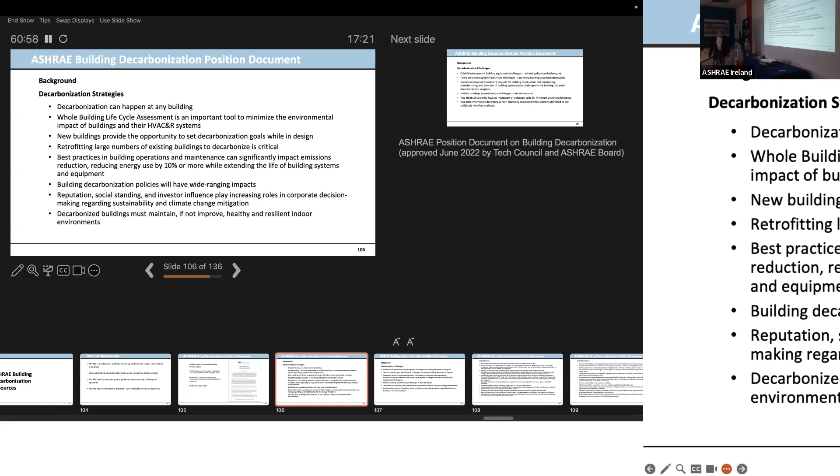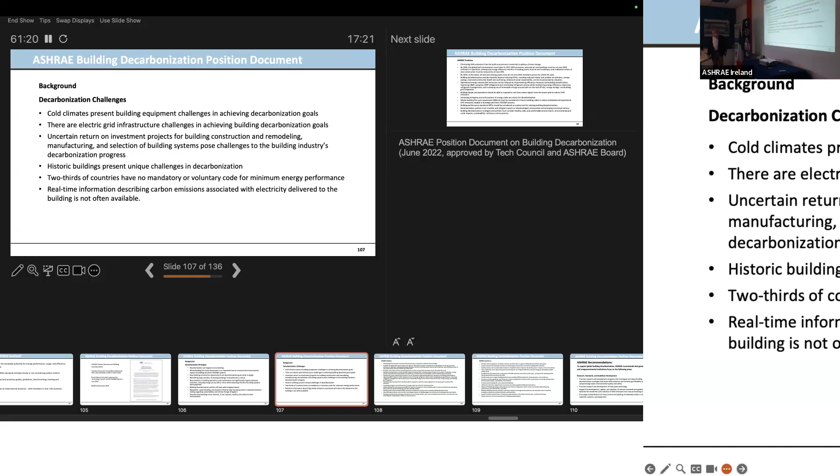Challenges, we talked about a lot of this: cold climates, grid, return on investment, historic buildings. We're not going to probably put insulation on the outside of historic buildings. No mandatory voluntary code in a lot of countries. And so those are the challenges.

Lots of things ASHRAE is committing to. Basically, they're saying in our research, our standards, and our technical guidance, we're going to focus that resource on building decarbonization. That is really key to that. And there are other aspects, I won't go into here, but it's kind of all the things I've been talking about already.

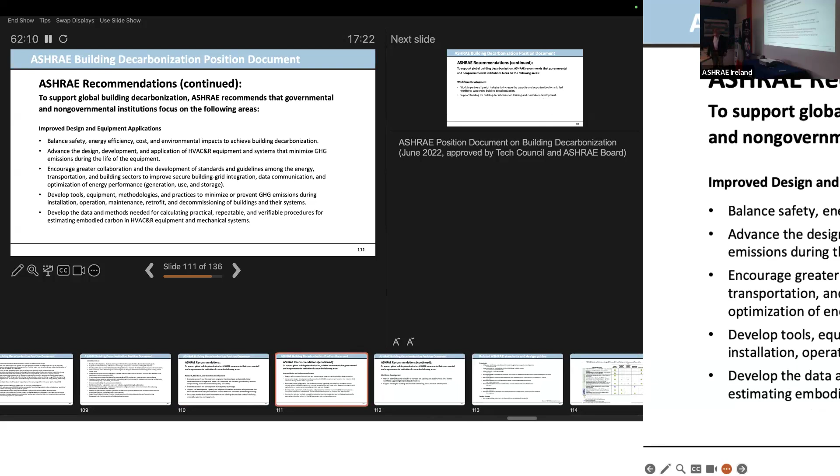They also recommend that other groups, government agencies, non-government institutions, research standards and guideline development, improve design and equipment applications for those groups, being able to do that in the HVAC&R and building services area. Tools that support that, data and methods, that's one of the key things. Workforce training, getting people out in the industry that have the skills to do building decarbonization beyond just the set we have now. We're going to need many more people working on this.

Lots of standards that are related. I mentioned standard 34, refrigerant safety, the ASHRAE energy standards, existing buildings, 105, which deals with how you go about determining building performance and greenhouse gas emissions, reducing release of halogenated refrigerants, standard for high performance green buildings, and a relatively new standard method of evaluating net zero and net zero carbon performance.

Several are underway, and I don't have them all listed here, but there's one on passive building design, so think passive house as a standard, and one on evaluating greenhouse gas—they had a meeting on that yesterday. They've also been creating zero energy building guides. They've created three, and I think that's probably all: K-12 schools, offices, and multifamily residential. So it covers a wide sector.

These guides show you how to get to zero energy in a variety of buildings, but also in most climates, which is kind of a key thing. If we can't get there, essentially they're saying building efficiency has to reduce typical building use by over half to get to the point where renewables can make up the difference.

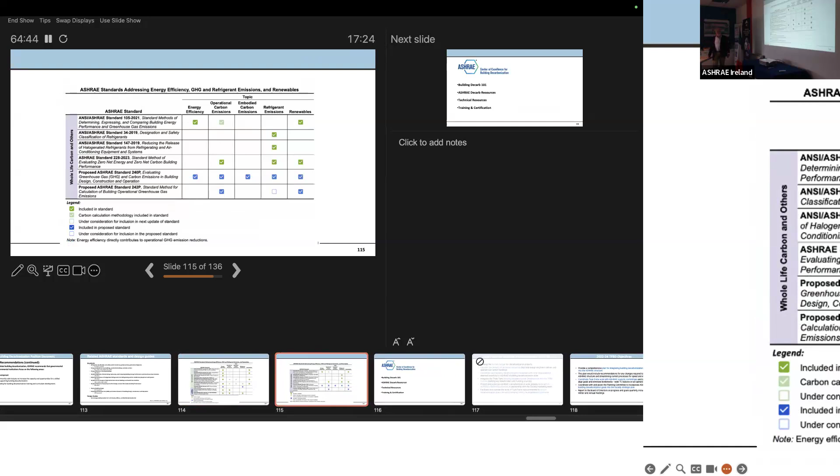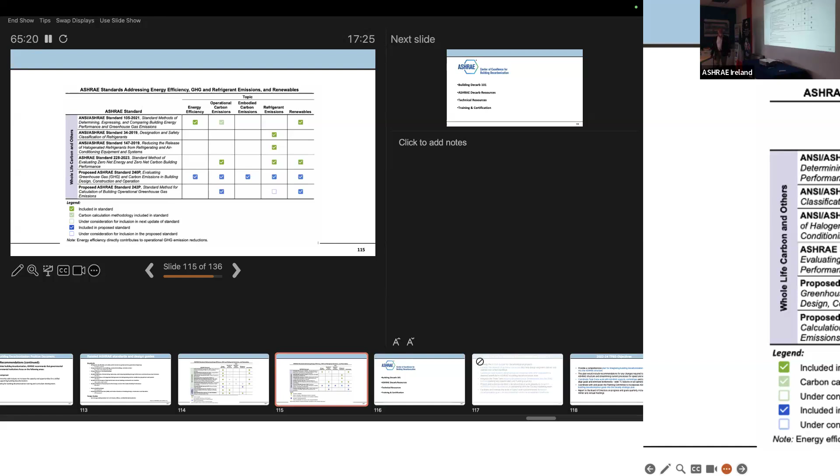The refrigerant standards talk about emissions from there. 228 talks about operational refrigerant and renewables, but not about efficiency or embodied carbon. 240 is supposed to be the one that combines all that, but there's a new standard for calculation. To me, these three standards—I don't know why they're not one, since they all deal with kind of the same aspect of what's going on. I think part of the problem was they were trying to get topics and things moving forward very quickly. 240, I think, will probably get published this year. It's very close, been under development for about two years, with lots of comments on it.

Other resources include a Building Decarb 101 set of slides and other materials, and ASHRAE's resource technical and certification training. ASHRAE has coalesced all this into what they call the Center of Excellence for Building Decarbonization, which reports directly to the board of directors. There's still a number of past presidents involved and other key people throughout. Their objective is pretty much to get decarbonization and all the issues related to it throughout the ASHRAE society. They delayed an update to the strategic plan because they wanted to get decarbonization in there.

Things they've already done: building performance standards, a technical resource guide, grid and interactive buildings, decarbonizing hospitals, and working with CIBSE—they published an update of CIBSE's TM65 for North America just last year. They're also working with the DOE lab on decarbonizing building thermal systems, particularly looking at heat pumps and beyond.

These are still not out there, even though it says winter 2024 - the building decarbonization retrofit and whole life carbon guide are still lagging. I hope to see them soon. They've been under development for a while. ASHRAE put money toward these, a lot of work, and its technical committees. The standards work is primarily volunteer, but ASHRAE has invested money in contractors to try to accelerate this work, working with an ASHRAE committee for that.

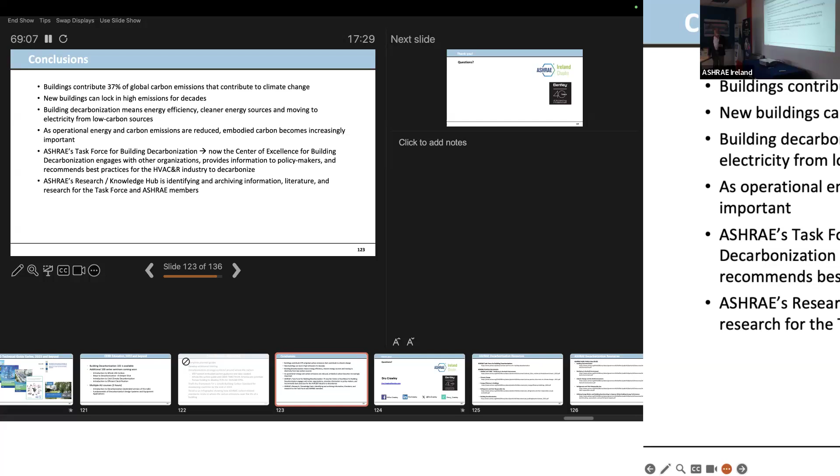So there we are. Thank you very much.